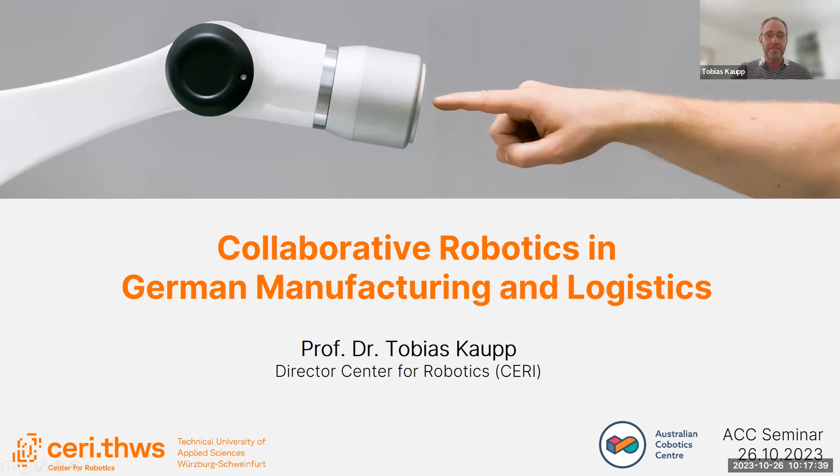So today I'm going to tell you a bit more about the work I do back home, we've heard the title. So I'll see if this works. Just very briefly on my background.

Australia is my second home, so I've already spent more than 15 years in this place, and I actually started off at QUT doing my diploma thesis. You can see this picture here, that's on top of building 10 when I was testing out the antenna I built back then in 2001.

After that, I moved to the ACFR and did my master thesis. So I found this nice picture on the web actually in Sydney Harbour of myself.

Then I did my PhD for 4 years at Sydney Uni and started a company together with two colleagues from the ACFR back then called Marathon Robotics. We make autonomous robotic targets for marksmanship training and tactical training for military and police. Some of you may have heard about them.

We also did a bit of an excursion into delivery drones. This picture is also from Brisbane, actually, where we worked with Australia Post back then to deliver packages in Brisbane suburbs. I'm still involved with that company, but my main job is now being a professor at THWS, and I spent the last 5 years establishing the Center for Robotics there.

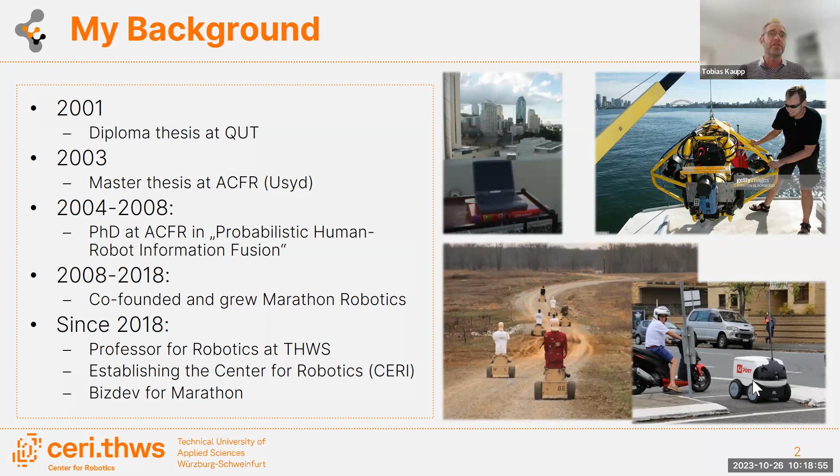So the outline of today, I shortened it a bit, so it should be okay for 45 minutes. I'll mostly talk about the applied research we do in two areas that are both relevant for the ACC: cobot-assisted assembly and manufacturing, and mobile manipulators for smart factories.

Just briefly on our university, I know it's hard to pronounce. Wuerzburg and Schweinfurt are the two cities, so they're in the northern part of Bavaria. Can you see my mouse, by the way, when I wiggle that? Okay, so 100,000 people and 50,000 people. It's further from Munich than it is from Frankfurt, but it's still Bavaria, which is actually a good thing because they have a lot of funding and put a lot of it into research and robotics recently.

So we have 10 faculties and also non-technical faculties, but everything technical is in Schweinfurt, and that's where we are with our Center for Robotics, which I'll talk about next.

So the Center for Robotics got funding mainly for teaching robotics, actually, but we are hijacking some of it for research. Our team consists of 9 professors with different backgrounds. We're hiring the last one actually in the next couple of days, on Friday. But yeah, the team is almost complete. We've got technical staff and admin staff, and we do applied research.

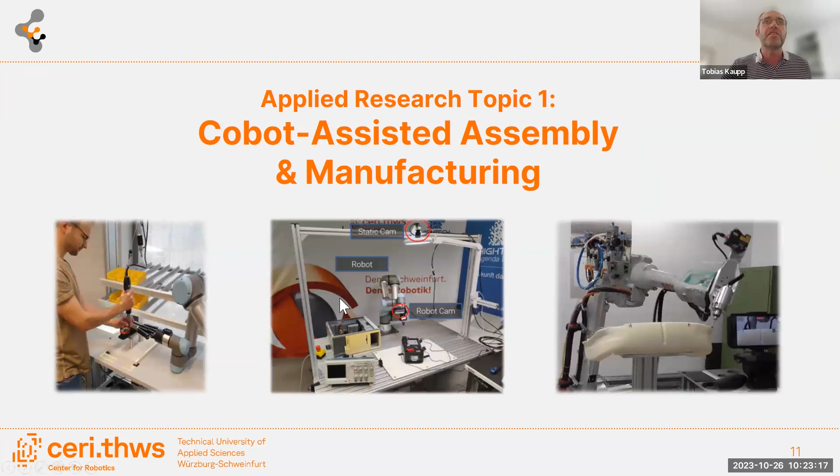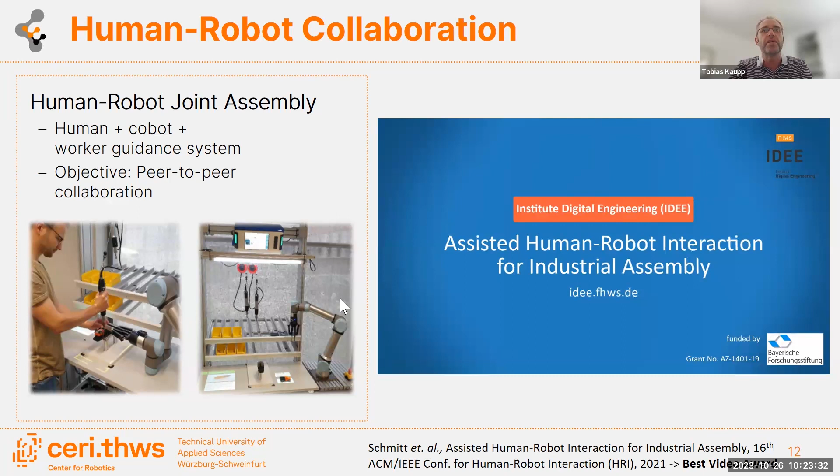Okay, so first part: cobot-assisted assembly and manufacturing. So one big area I'm focusing on is human-robot collaboration. The idea is to have humans, cobots, and a worker guidance system work together with the goal of jointly assembling goods. I'll show you a little video which will illustrate what we're trying to do.

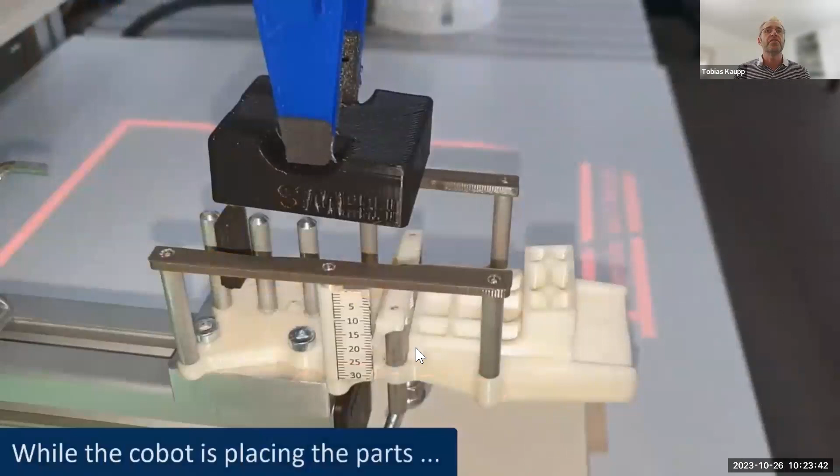So we set up this demonstrator initially, and you can see here the human and the robot are working in parallel. That's always good - if they work in parallel, it's productive. You also notice a so-called worker guidance system - we project things onto the workspace here, instructions for the humans, warnings, etc.

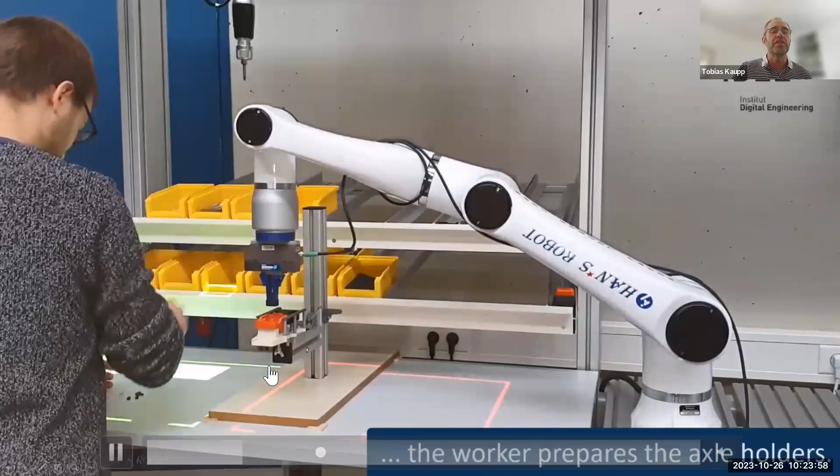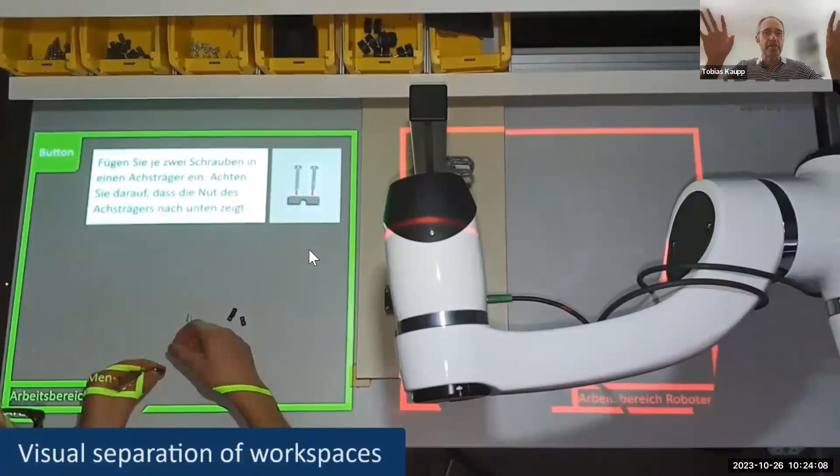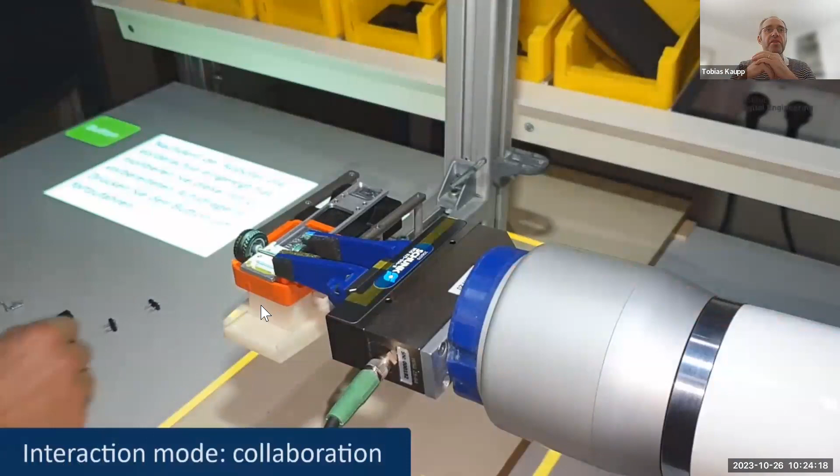And you can see here the projections again. You see here this type of collaboration, which could probably be called cooperation, because they have separate work areas. Next we can see an example of actual collaboration - that means working closely at the same time on the same product with human and robot. So the robot just brought this axle, and the worker is now attaching it. The robot is essentially a third hand.

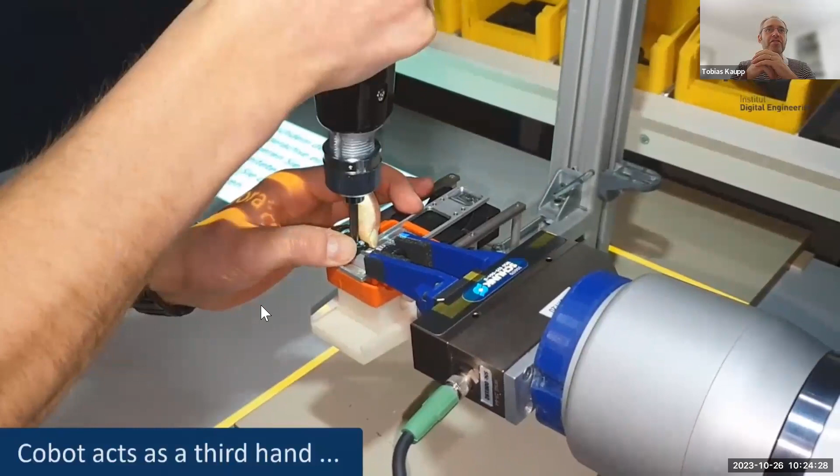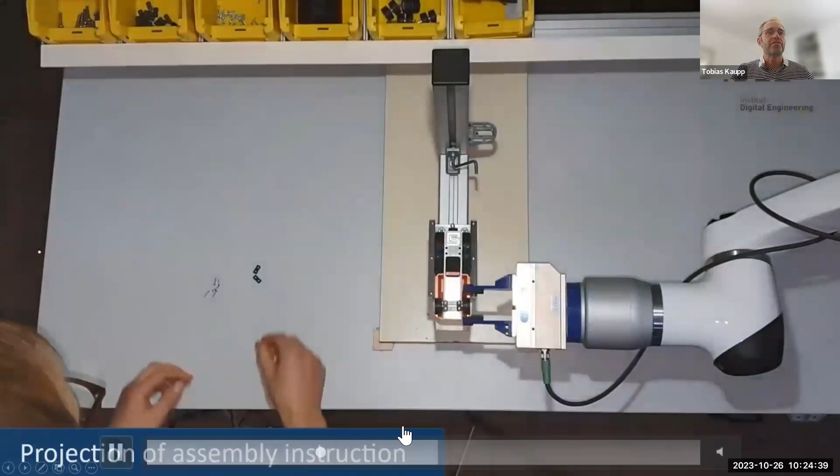So this is a simple example of a closer collaboration, and we indicate it using this yellow frame here in the middle. You'll also notice, if you just missed it, this button was just pressed by the person. So basically the workflow is in total control of the worker here.

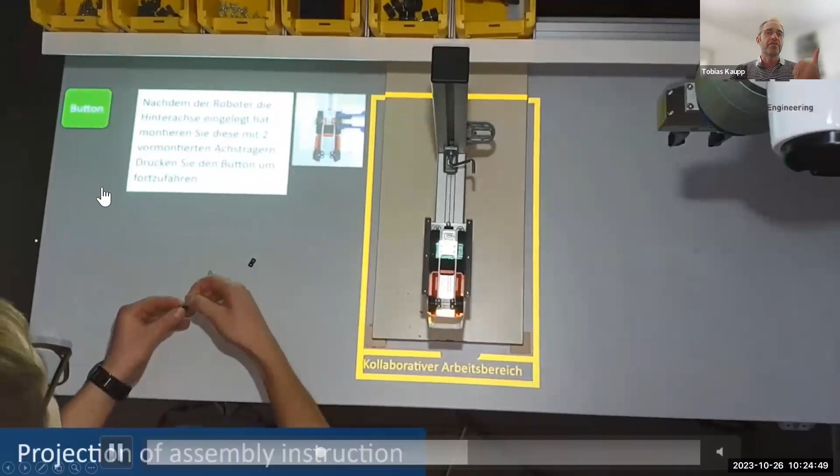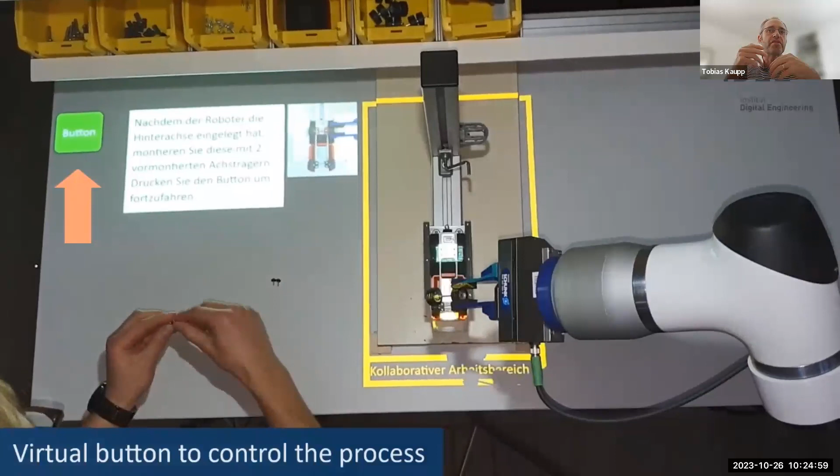So is the system smart? No, not really - everything's pre-programmed. The person is in control of the workflow with this button. And thirdly, the human-robot assembly sequence was completely handcrafted, so who does what at what time needs to be worked out from scratch for every new product.

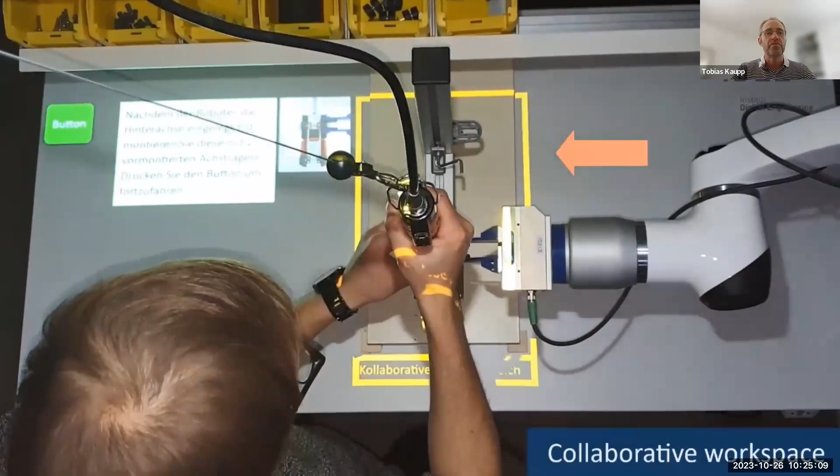So we're trying to address those shortcomings in our research. We applied for funding for a 3-year research program to address some of these issues. The goals here - we got this approved, and we're halfway through already. It's the Bavarian Research Foundation that funds it, and we have 2 PhD students working on it.

So the goals here are automatically deriving these assembly sequences from existing process and product data. Rather than handcrafting, we want to generate the assembly sequences automatically. Secondly, once we have those, we want to adjust them at runtime depending on the situation - if humans are involved, things may change, and we want to be able to adapt and monitor the progress. I've got a little video for that as well, which we call the process chain. Let's play it.

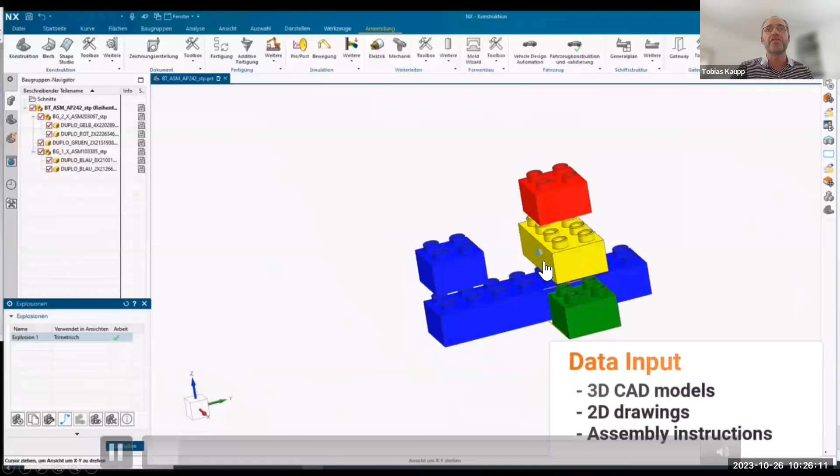So the input data into the system is basically like step files, for example - CAD data. This is a very simple assembly of a few Lego blocks. There could be other input too, I'll show you later - 2D drawings, for instance. And the first thing that happens now in our framework is the extraction of data.

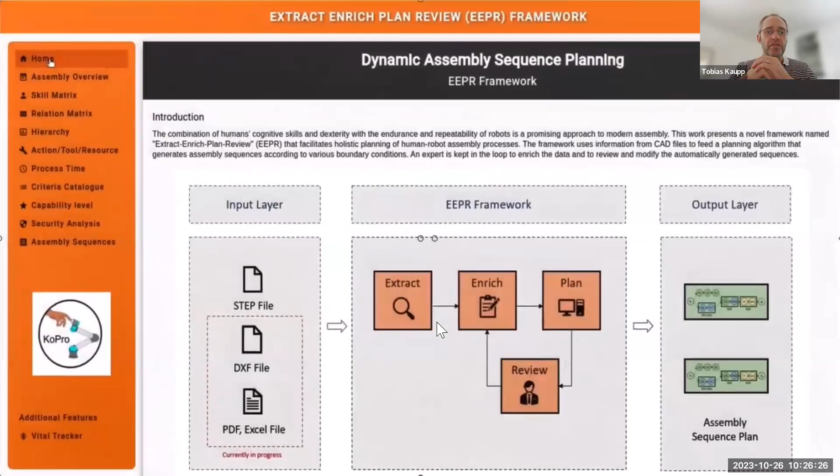This data goes into a so-called dashboard, and the dashboard is then presented to a product expert, so the product expert can review what has been automatically extracted. In this case, we'll see those individual Duplo blocks are identified as components, and more importantly, this relationship matrix has been established - how the individual components relate to each other in terms of the assembly.

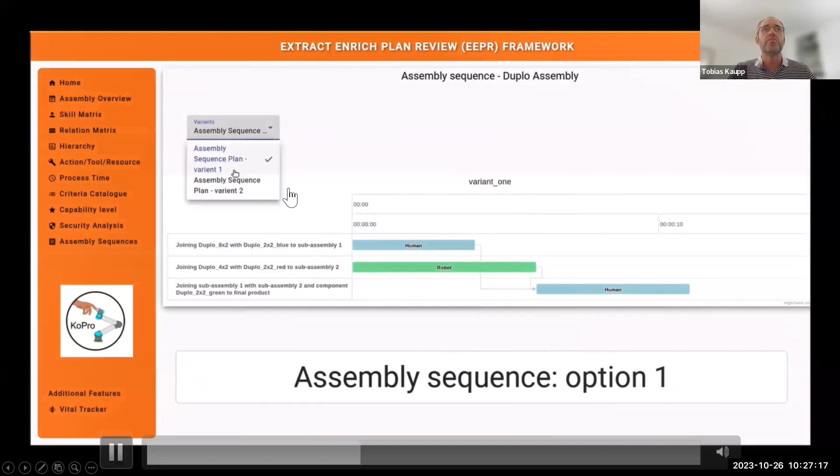Other information can also be added, which may not have been available from the product data that was fed into the system. What pops out is shown next. For this simple assembly, we get a sequence plan where the human does one step in parallel to the robot, then the third step is done by the human, with projected times. There's also a second option where the robot does step 1 and the human does step 2. So there could be several options coming out of this system.

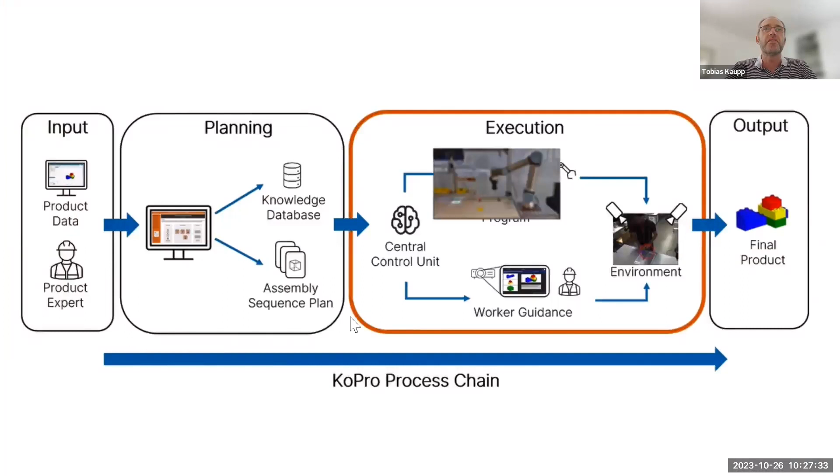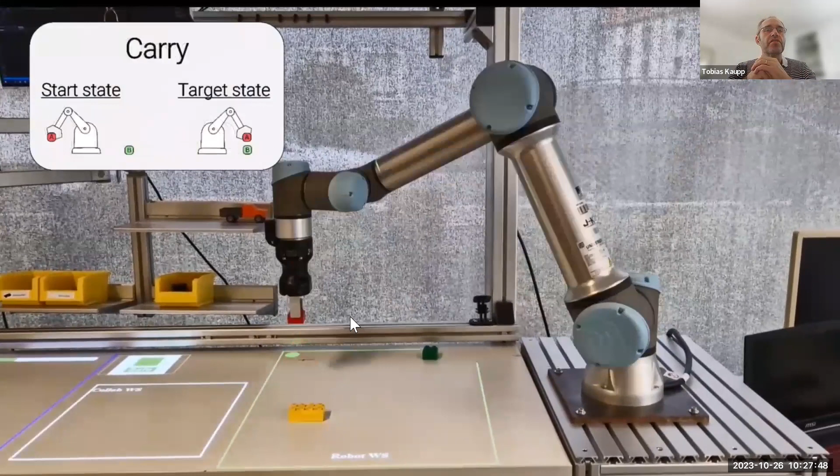Now over to the runtime execution stage. Once this assembly sequence plan has been generated, we can automatically generate robot motions using generic functions. Here you can see reach, grasp, and carry, and the last one is release. These are generic functions that need to be parameterized at runtime, but apart from that, everything is generated—no one wrote any code.

And we can do the same thing on the human side. We can generate instructions for the worker, either shown on a screen like here, or projected onto the workspace, as shown here.

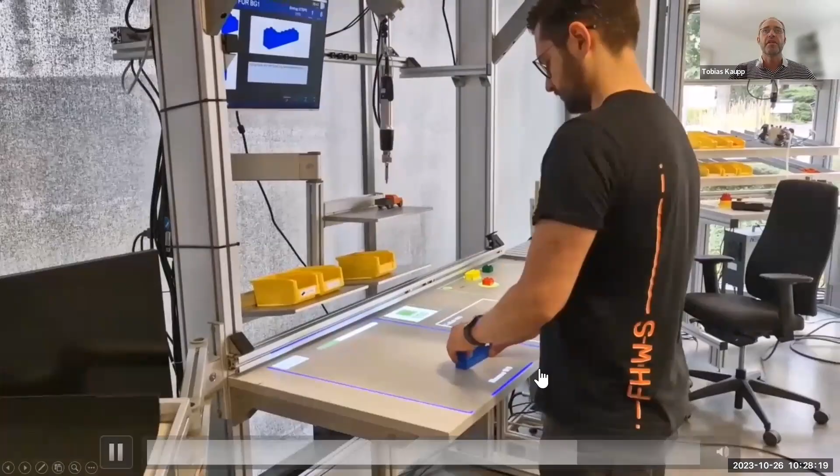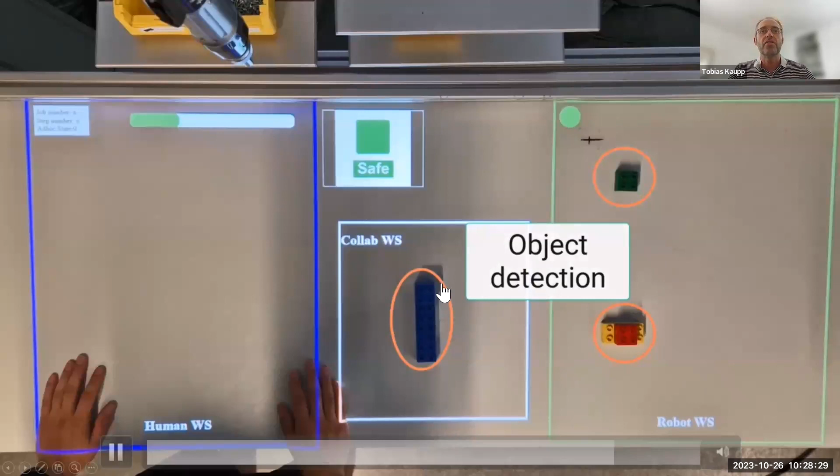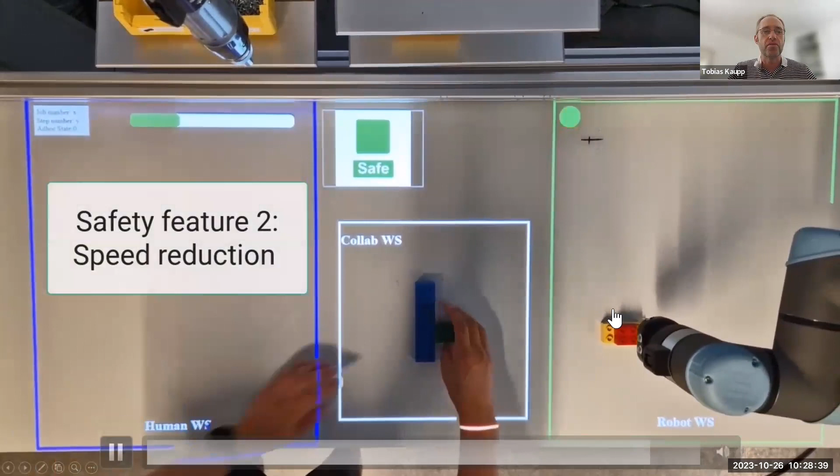Based on that, for this to work, we also need certain technological components. One is object detection, so we need to detect where the objects are on the workspace. Another is safety, so we separate those areas visually, and we track when the human hand is close to the robot so we slow down the robot automatically. This body tracking is also used for something else called anomaly detection—I'll talk more about that later.

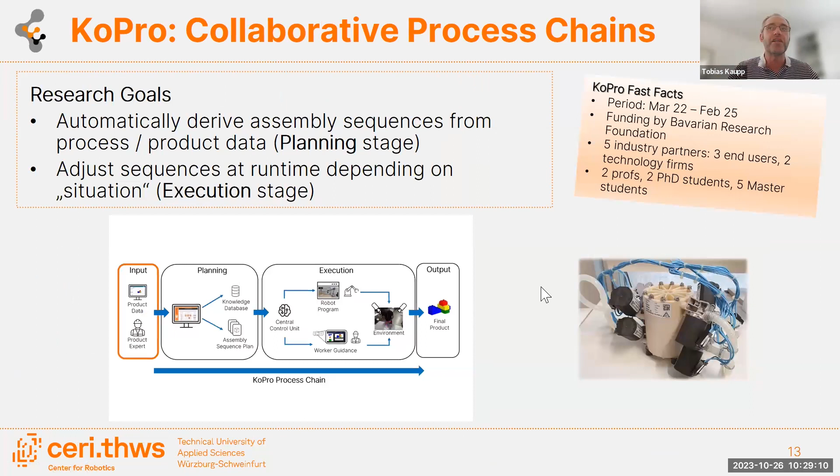For task allocation, we rely on profiles, which we call a skill matrix. So user profiles—for instance, one person could be right-handed, another left-handed, and you do things differently with those people. Or you have skills for robots—certain kinematics can do certain things, others cannot. If you put those profiles in the back end, we can make use of that information for the planning.

At the end of the day, we also have weights for cost, quality, and time—that means, for this product, what are the relative importances of those three factors. Again, that could be inserted by a product expert. Cost is very important here, quality less so. Mostly all three are important, but there are some relative weights.

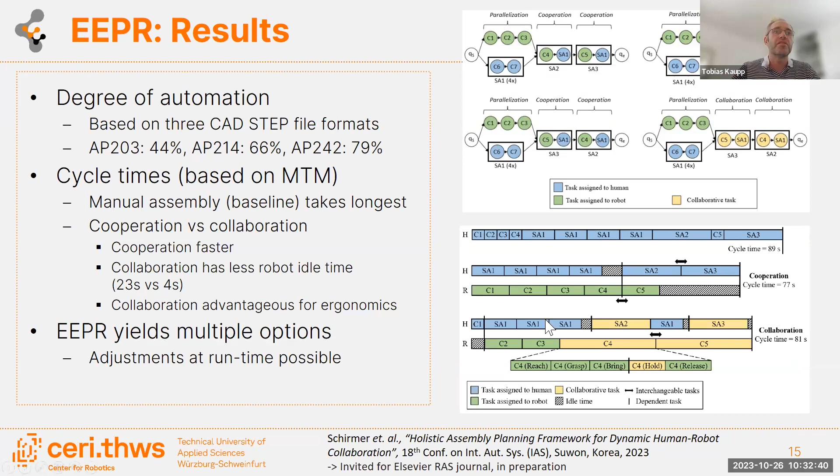So we used a pre-trained model, and it didn't quite work. We got verbs and components, but not tools, based on German newspaper data. So apparently not enough tools in the newspaper. So we created our own data set with ChatGPT and used some transfer learning, and then we managed to extract all 3 of those based on instructions we got from our industry partners.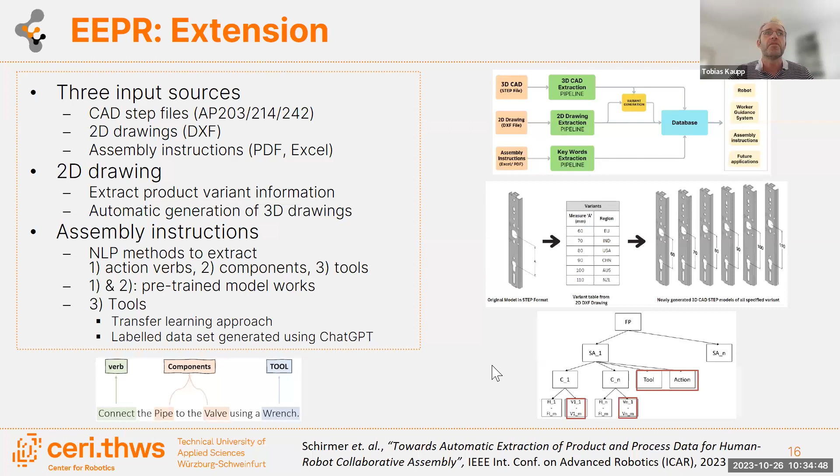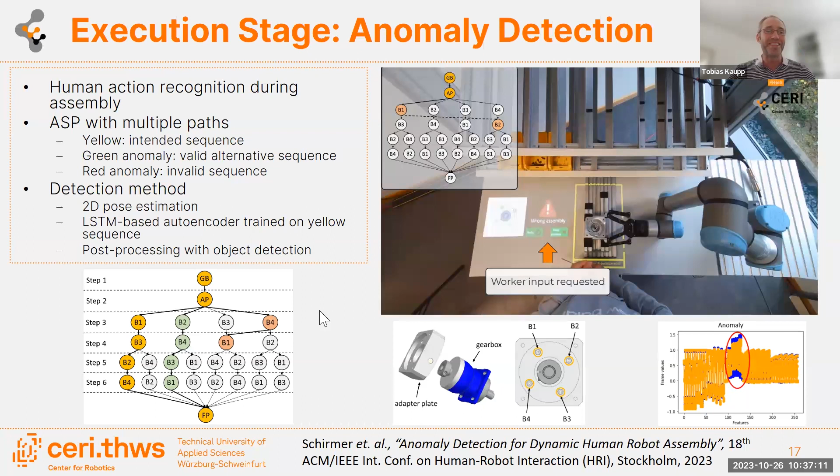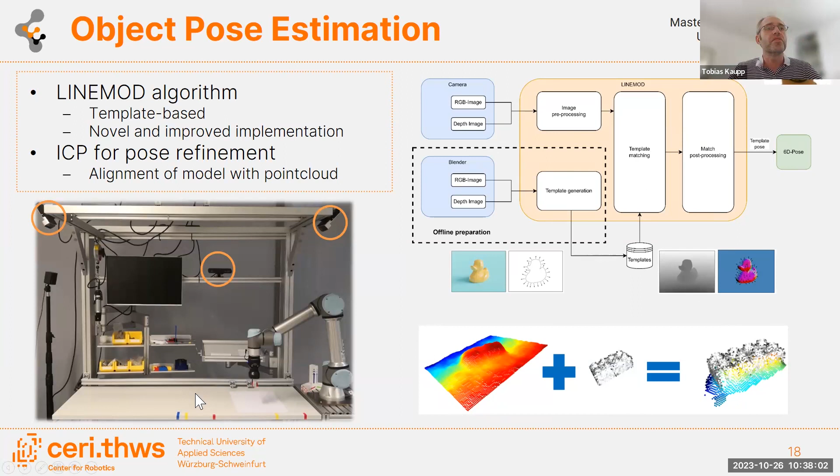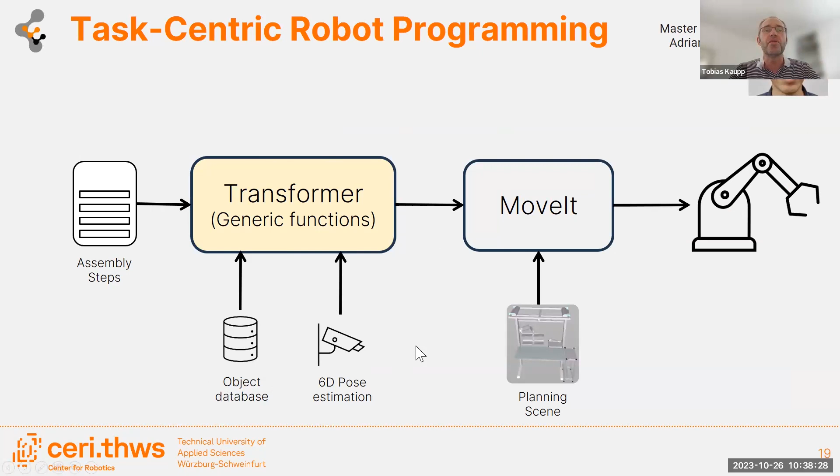And Adrian is working on task-centric robot programming, those generic functions I mentioned briefly. You can see this component we call the transformer. The assembly steps from the planning unit get fed in, we have known objects from the database, and from Usama's component we get the 6D pose estimation.

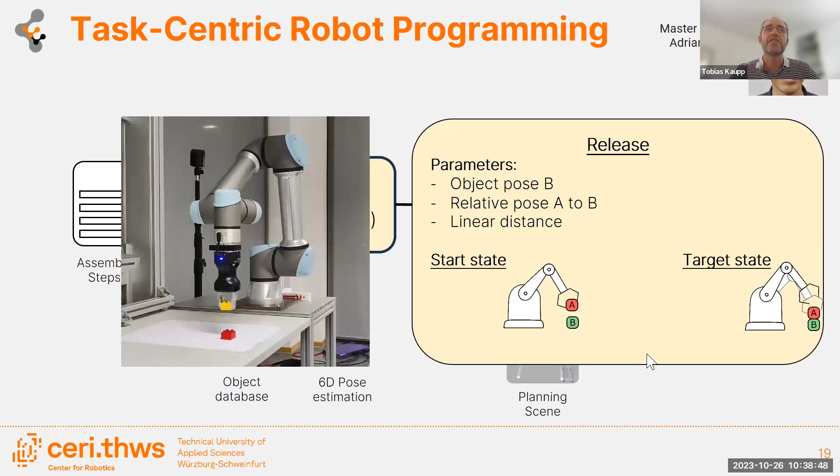Using that information we can now parameterize the generic functions. We can see the parameters required that come from these three inputs for each, and we have one for each: grasp, carry, which we've seen already, release, and we extended this framework with also a joining operation.

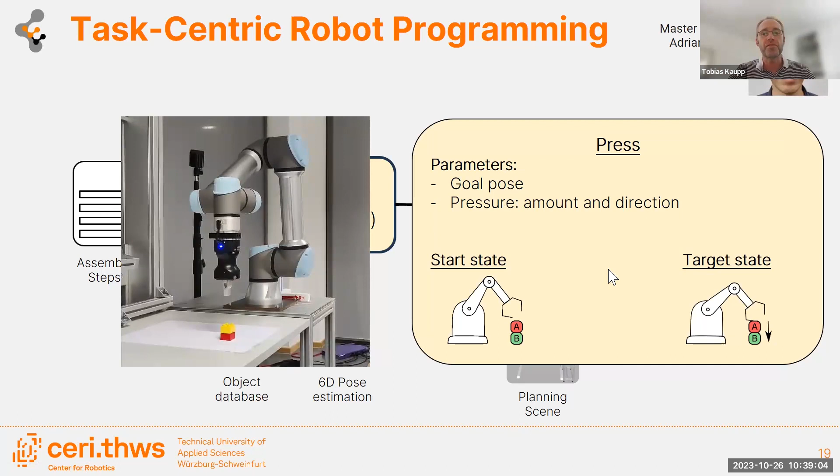All right, so this was task-centric robot programming. I also wanted to show one slide on the work we've just started on user-centric robot programming. There's some overlap with your program too as well.

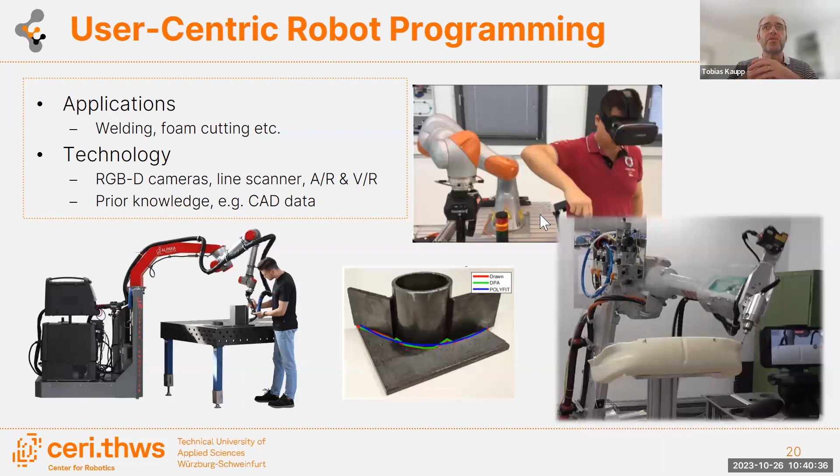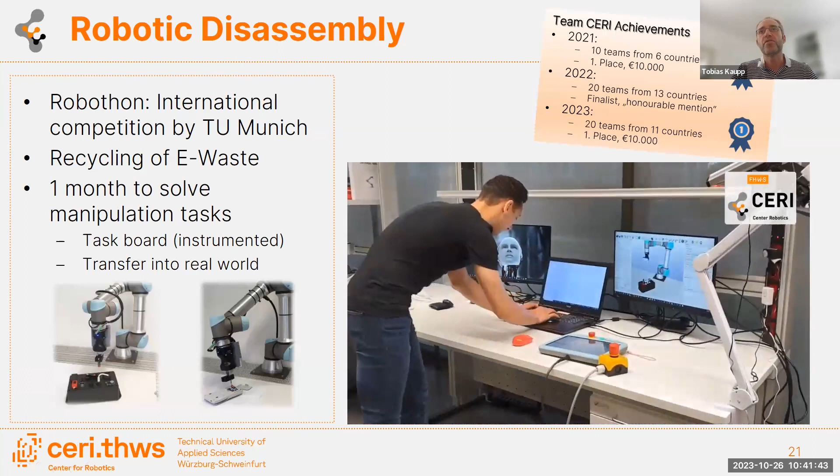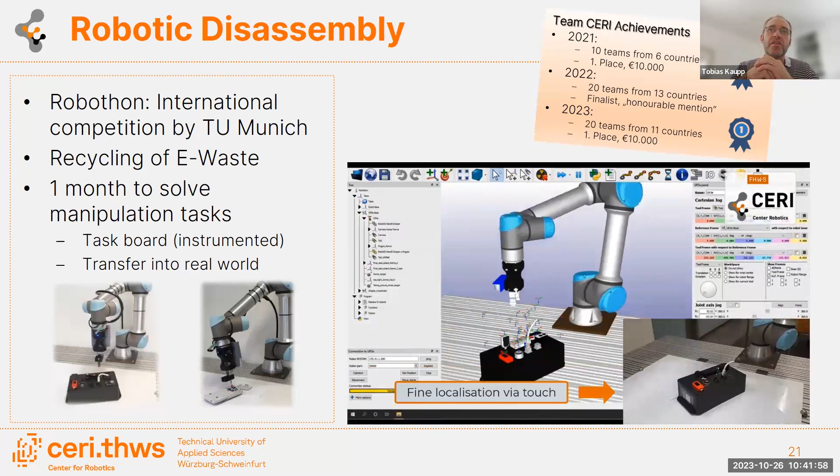That's the first task. So in the previous year, we opted for an approach where we have a rough localization using image processing, and then we touch the sides for fine localization. This is not uncommon in industry to do that approach for localizing objects. And from then on, you can start manipulating, and I'll show you some of the tasks.

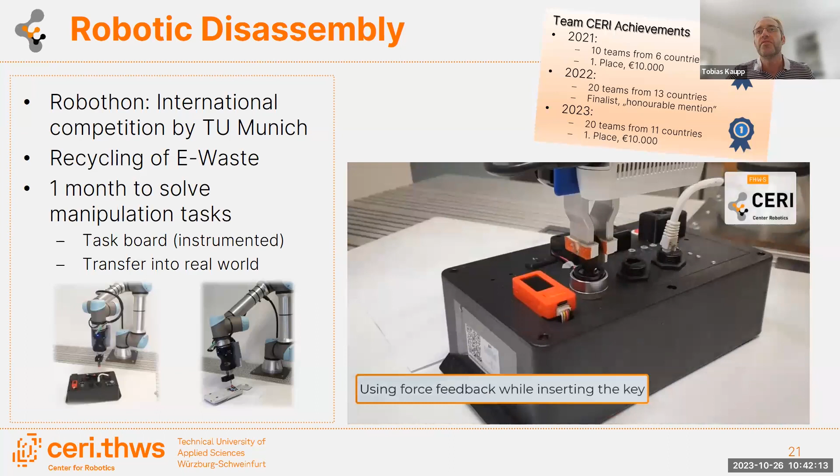So here, a key needs to be inserted and turned. By the way, I forgot to mention this taskboard is completely instrumented, so it has sensors inside, and it has a microcontroller shown here. It can record the times it takes, and register successful and unsuccessful tasks and so on.

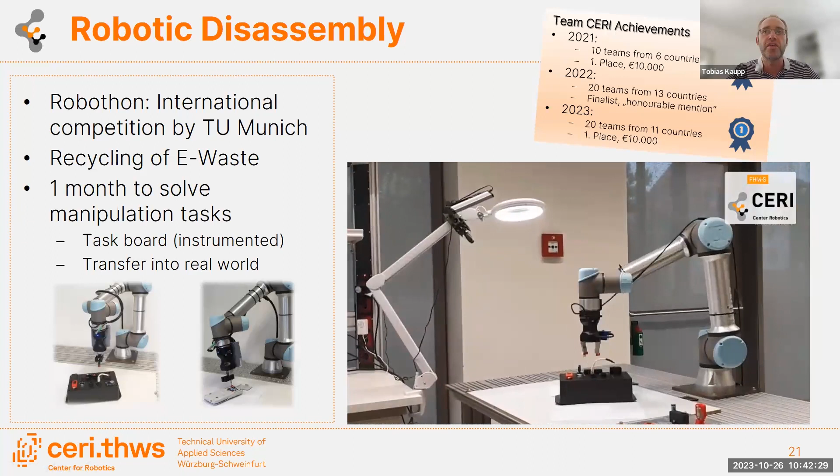So here's an exciting bit, removing batteries. They need to then be inserted into those little holes here, so peg-in-hole sort of application. We came up with a pretty pragmatic solution to put those things upright, so you can see that. And that's not very accurate, as you can imagine.

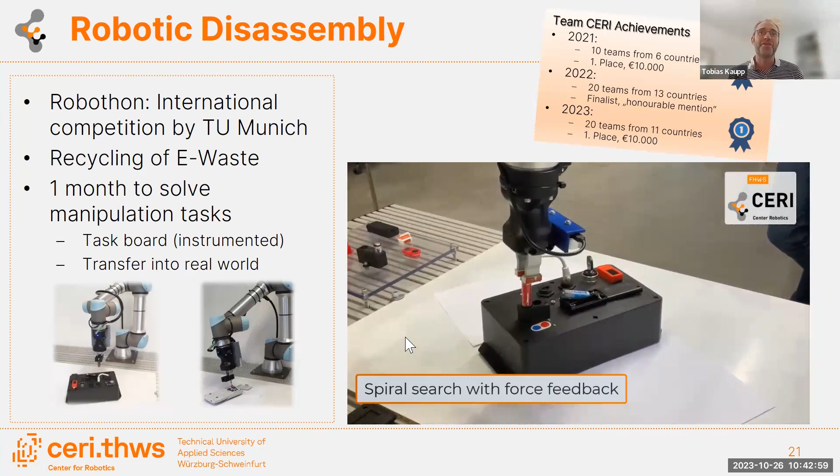So we now used a spiral search with force feedback to insert it. We came up with better solutions after, but it's cool to see how it develops and how sometimes pragmatic solutions get you to the goal.

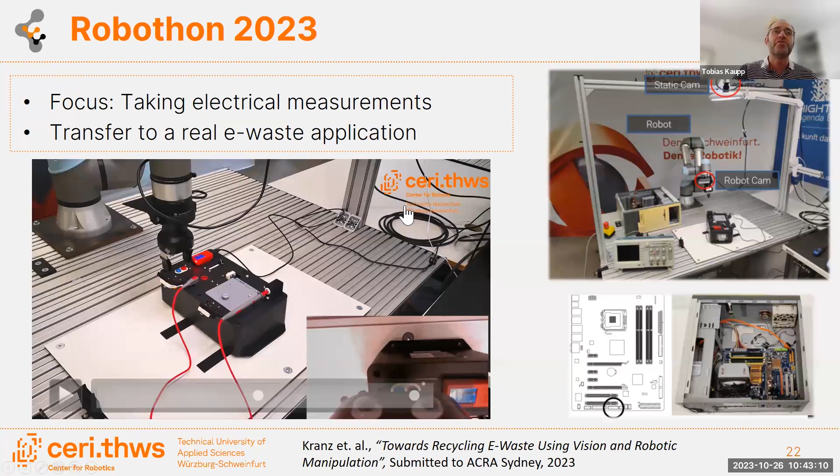Okay, so this year, in '23, the focus changed a little bit, and it was all about taking electrical measurements. I'll show you again a little video. So now our vision system has improved a lot, so we can just take a quick photo and we know exactly where the taskboard is.

There was another vision task here where we need to detect those triangles and move that slider. And then after that, the measurement was supposed to take place. So we opened this hatch using the probe to save some time, and then take the measurement.

And the exciting bit is coming up, which is winding up that cable. So again, deformable objects, not solved in general. So we made this little hook, and now we're winding up the cable.

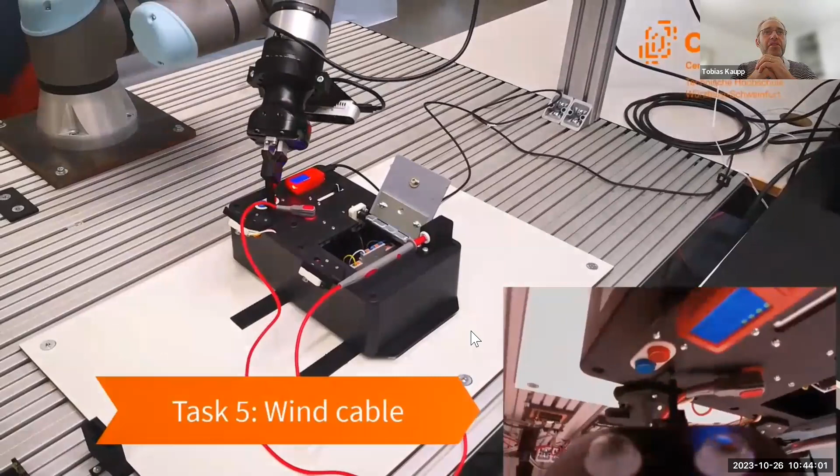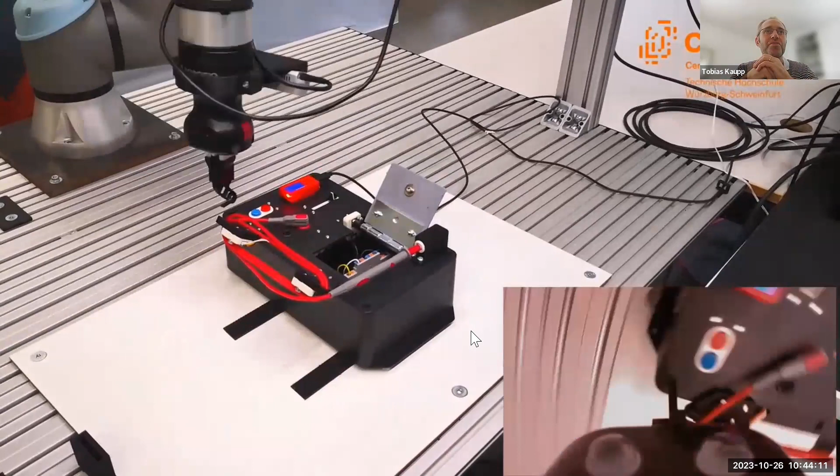Important to note is, again, this has to work in all orientations of the taskboard there, so you can't completely pre-program this. You need to do some things so that it works under all conditions.

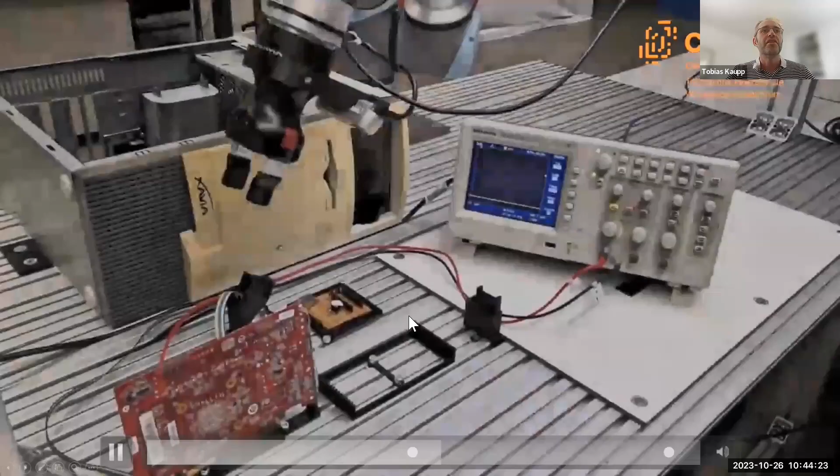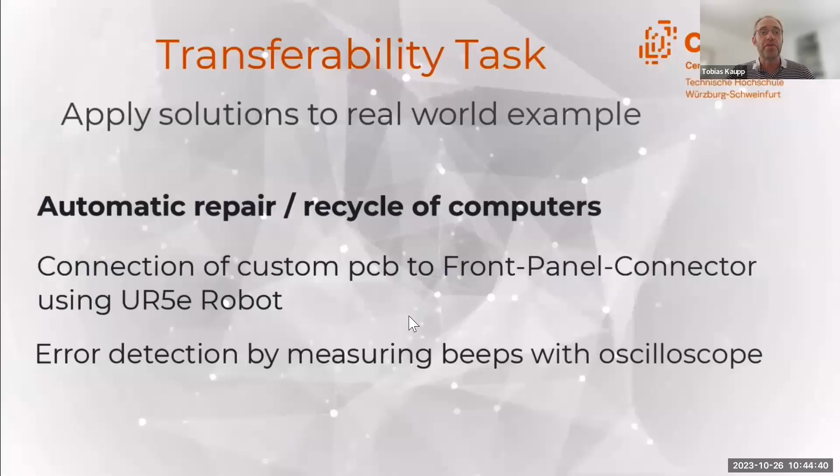So the other part I want to show here is now the transfer into the real world. We came up with an idea of diagnosing PCs. Here you can see a standard connector we printed, goes to a standard interface most computers have. And then we connect the other end to an oscilloscope using this little board, and now we can read out error signals from the PC.

I don't know if we can hear this annoying beep - most of you may know when the RAM is missing. So now we know that the RAM is either faulty or missing, and we use a YOLO detection to see if it's actually there. And if it's there, we swap it out.

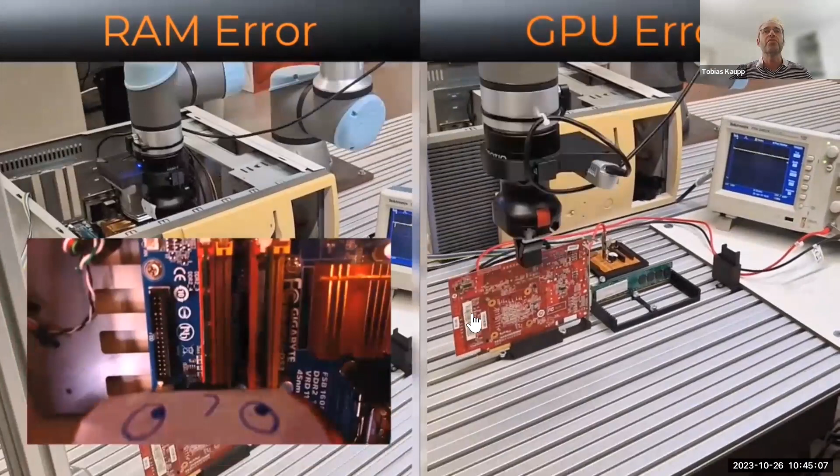As you can see the robot going in there, manipulating the RAM bar, and also the same thing we did for the GPU. So this could be a useful system for recycling and testing of components.

Right, so we also tried to get some quantitative data. I don't have time to talk about the details, but it's going to hopefully be in a paper if it's accepted soon. So we did some experiments here at THWS on human performance, just very simple pilot experiments - how quickly can a human wind up this cable or do these little things?

And it turns out humans are still better than our best automated solution, but also there's a higher variance. So as expected, people are different and do it differently. So the variance is higher, but the mean or the median here was actually better than the automated solutions.

So we're thinking in this area of disassembly, human-robot collaboration could be a good approach again - once it gets more complicated, once you have mechatronic systems that need to be disassembled in an unknown state, I think the combination of human and robot skills would do pretty well. So that's an area we want to do some more research in.

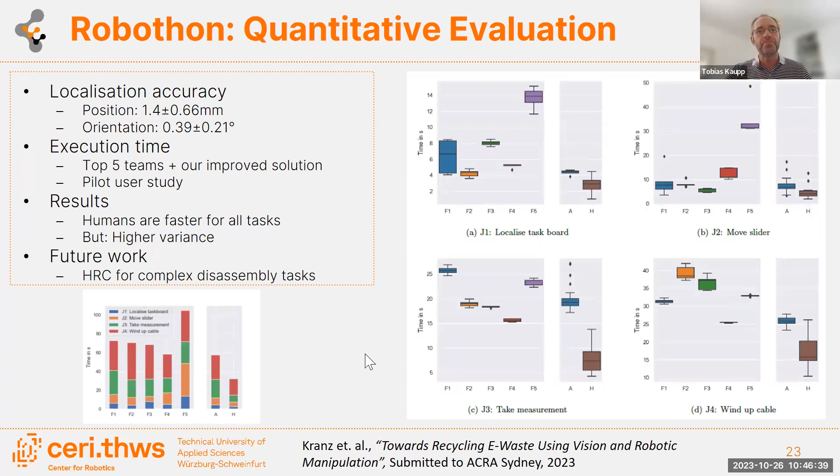Okay, this was the first part. Second part is now mobile manipulators in smart factories, or you can call it cobots on wheels.

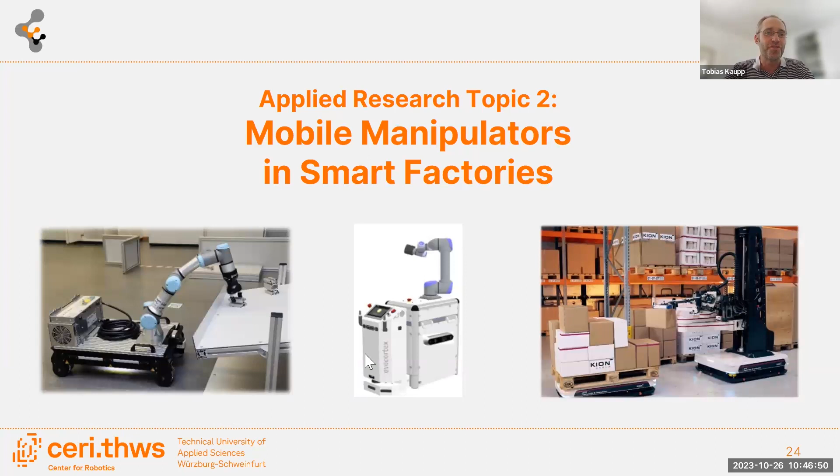We are working on a three-year research project, almost three quarters through, developing a mobile picking robot for warehouse commissioning. There's a warehouse with pallets that have uniform packets on it, and the robot goes around and picks these packets and establishes a so-called mixed pallet, which is what will go out to the supermarkets. This is done with manual drivers at the moment, and the goal is to automate it.

Even the challenge here is mixed operation, so humans and robots will work in the same space doing the same task. We do this with Linde material handling. Linde makes forklifts and has big customers with lots of products in big warehouses. Linde focuses more on the integration and the hardware, and we can focus on the perception for manipulation of objects.

The challenge for this object detection task is the big variation of products. We've got more than 1,000 different products, and it has to be possible to add new products easily since they come out all the time. The particular thing here is that we have lots of instances of the identical object class. Often in object detection you have different classes, like cats and dogs, but here we have just one type with many instances, which makes it a special problem.

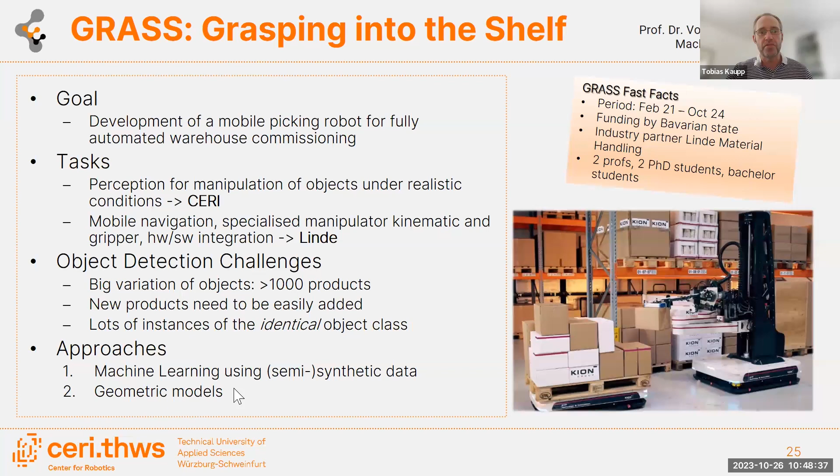We took two approaches so far. One is machine learning based, using semi-synthetic data, and the other is geometric. I'll show you some of both. Let's start with the machine learning approach.

We know we need to do package detection and instance segmentation. The requirements for any dataset for machine learning is it has to be large. We want automatic labeling, high variation, and it needs to be realistic and extendable to new products.

So what we opted for is using a synthetic environment but adding some real information, and the real information here is the texture. This is a real photo of some texture, and we add that to the synthetic dataset. We can also vary it - this knife symbol can be removed, and we can vary the texture slightly. The rest is standard domain randomization: different backgrounds, different lighting conditions, different camera angles, and so on.

So this is our basic approach, and then we try to train some networks. The guys are still working on different options here. We've tried just the YOLO version 4 with the top view. Here are some qualitative results of robustness.

There's a bit of a lag between right and left, but you can see if you remove some of those packets, it's still robust. It detects the next layer already, and so on. So we got reasonable results here.

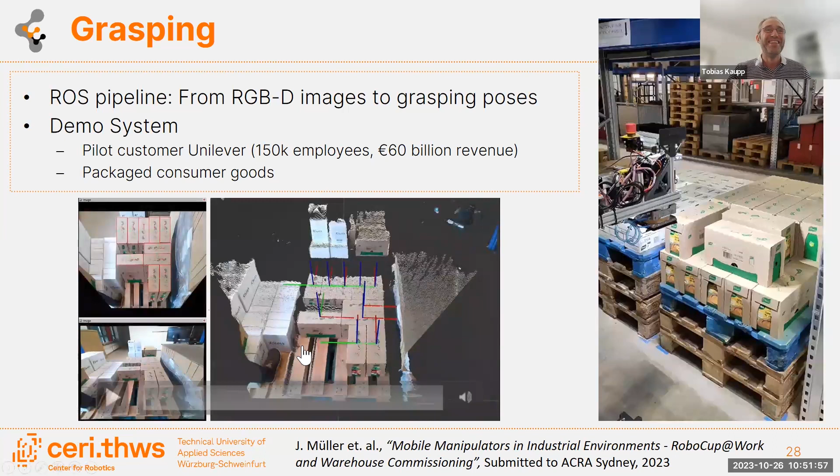Here's another video I got last night - you can see the grasping poses in the middle of those packages. Here we're showing that the detection is robust when you remove packages. He forgot to add them again, but that should work as well. And finally, some actual grasping.

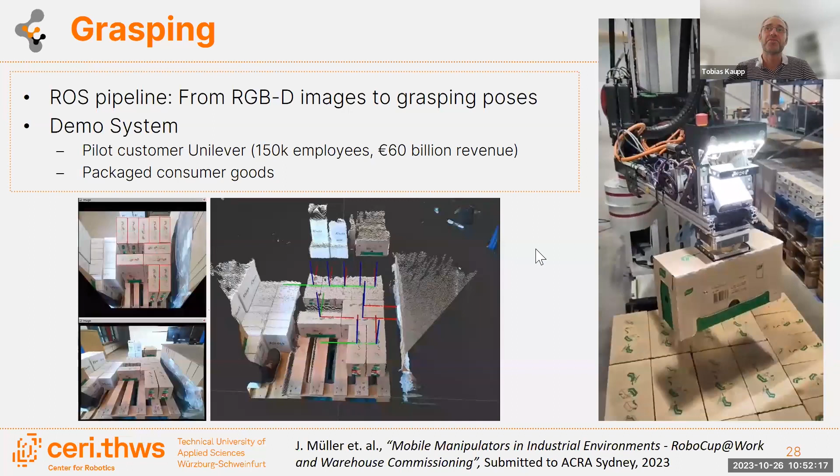So, this is a prototype the industry partner built, and we can now basically see it working. Not that exciting, but always good to see when something is actually working. So that's some result of grasping it using that pipeline we built. You can imagine there's a fair bit of software architecture as well to build.

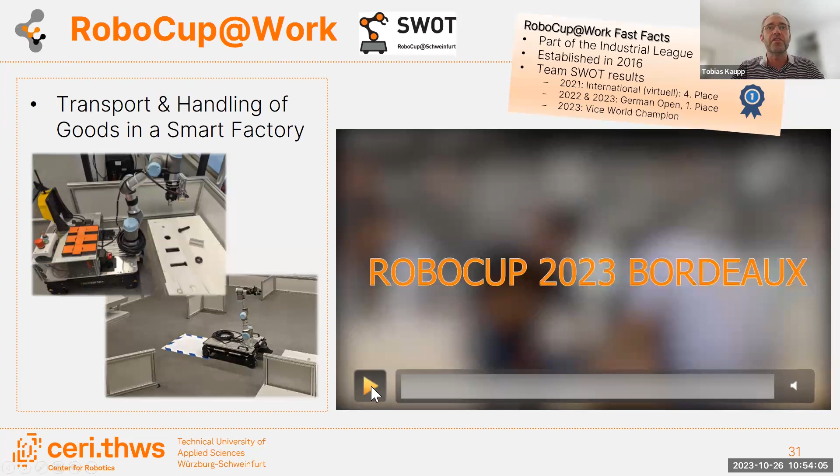Okay, so this was the industry project. And now over to RoboCup. We're also participating in the RoboCup at Work competition. There's a lot of overlap with this other project, so the same principles work on both - one's in a competition setting, the other in an industrial setting. We participated a few times now, and just in the international one for the first time. I was there for the whole week. It was very cool to see everything coming together.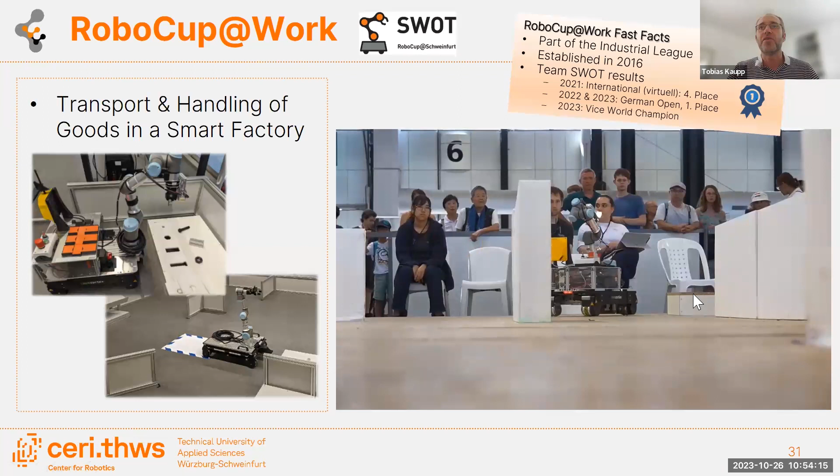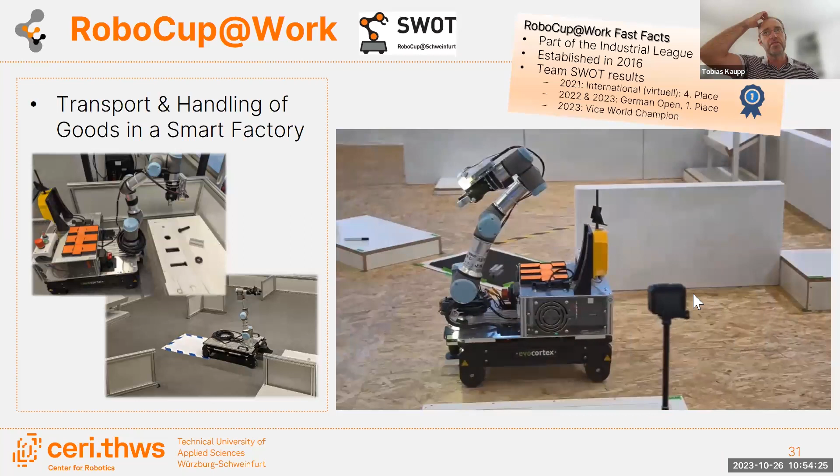Here are some impressions of our robot moving through this arena, autonomously navigating, picking up objects, and delivering them somewhere else. Here you can see it looking at some objects, detecting them - they're hidden behind this box, but you get the idea - picking it up and transporting it somewhere else. And there's always an applause if something works.

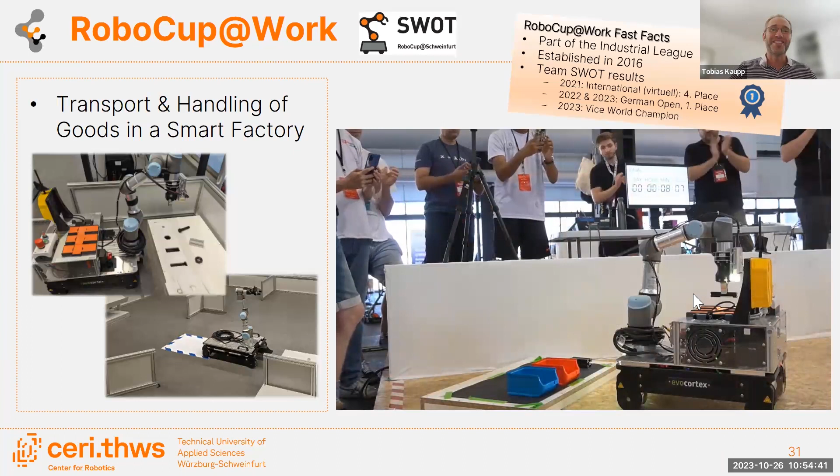Right, so to give you an idea how this competition is set up, they call them tests. As part of this week of 3 or 4 days RoboCup, we had 6 different tests, increasing the number of objects and the challenges for perception. For instance, the backgrounds change from white to something else, like brown or green. The objects sometimes need to be inserted into boxes, red and blue. There are more challenging shelves, like a rotating one here, basically simulating a conveyor belt, or inserting objects into cavities - like any toddler can do, but not many robots can so far.

So this gives you an idea in terms of navigation - you add some obstacles that were not in the map, or some marker tapes on the floor, so you need to detect the floor tape as a virtual obstacle and things like that.

Tobias, sorry to interrupt. We have about 5 minutes left. I was just wondering if there might be some time for people to ask questions.

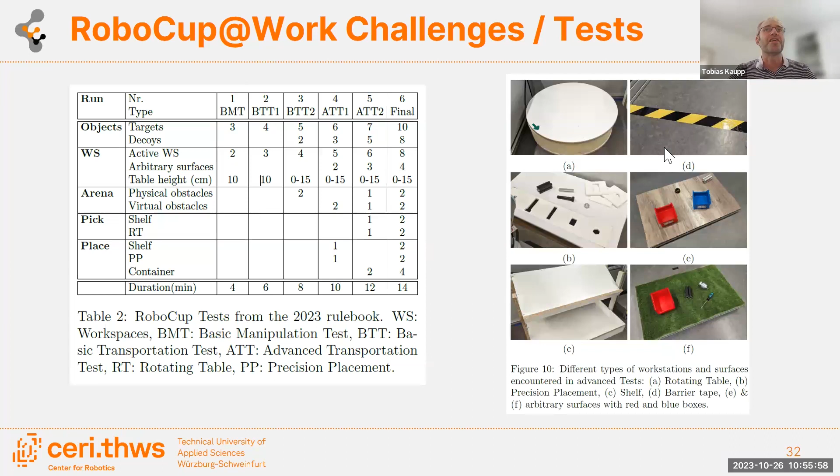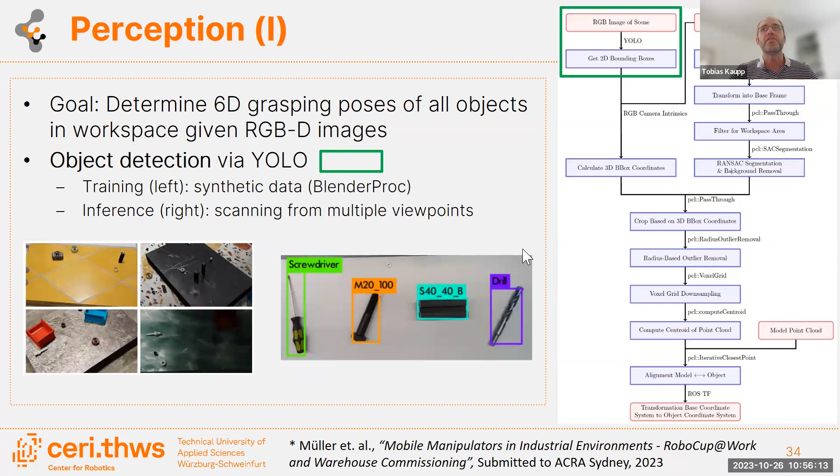Yeah, okay, right, I'm almost done. So actually, we don't have to go through all the details here. The perception system we built is very similar to what I showed before for the other framework. We also put a paper in, so hopefully the details will be published very soon.

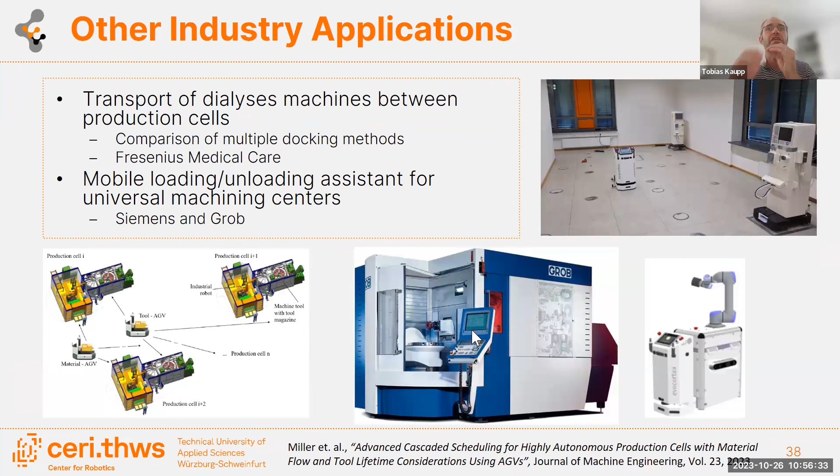There's other industry applications we do with mobile manipulators, and another interesting one is moving things between production cells. So here is a machining center that needs materials and tools, and mobile manipulators can serve that need of transporting things to and from them. So just very quickly, I also want to give a brief outlook on what we are doing here at ACC with Adrian and with Usama.

So we're working on program 1, building on top of work from Lan and others on Log-GPIS for creating distance fields, which you can see on the bottom right. I'm reconstructing the ACC logo here. As a side benefit, you get this distance field, so you know for every point in this space how far the obstacles or structure are away. We want to use that for human-robot collaboration manipulation tasks going forward. We started working on the software framework and are making good progress, so hopefully we'll be able to report more going forward.

So yeah, sorry, I took too long, but we'll leave some time for questions.

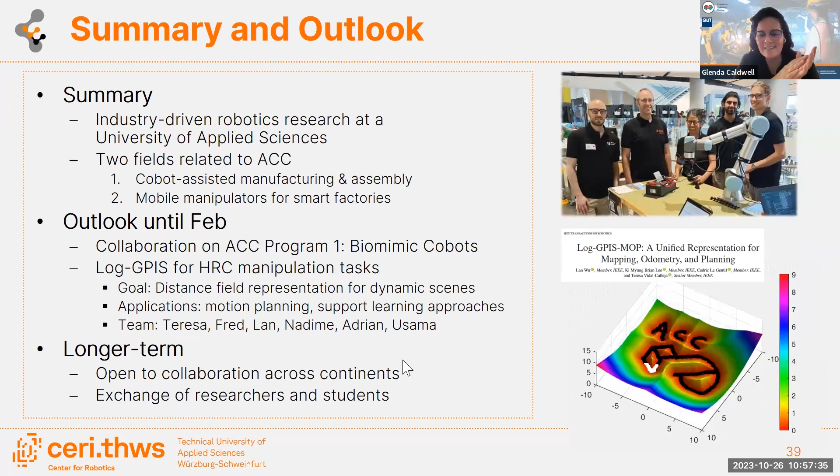It's just so much, it's so brilliant. Love it all. I imagine there'll be some questions, we have time for maybe 2 questions from the audience, and this will be recorded as well. So it has been recorded, right? I think, yeah, bravo, it's excellent, so exciting to see.

Now, anyone want to ask a question? I mean, I can see all the overlaps for everyone. Is there a question there, Maren, in the room? Yeah, all right, well, I'll ask one.

Thank you, Tobias, that was very exciting. Marcus from Program 2. I'm really interested in the aspects of human-robot interaction. In your first assembly task, you had this system detecting the human making a correct or incorrect assembly, and I was really interested in that. In our experience working with industry partners, it's often not black and white what is correct and what is not, for example in soldering or welding. It's very complex to determine what's actually a correct approach, and I think it's important to acknowledge inter-individual differences in how people work and perform tasks. So I'm wondering what your thoughts were on how that could be accommodated in a system like yours.

Yeah, exactly, that's something we want to address as well, the individual differences. One simple way is the example of putting profiles into the system, right-handed, left-handed, things like that. Of course there are privacy issues we have to check and address. But even at the planning stage, you can already accommodate the particular needs of individuals. You can imagine someone logging in with their ID, the profile is right there, and then the assembly sequence is generated differently.